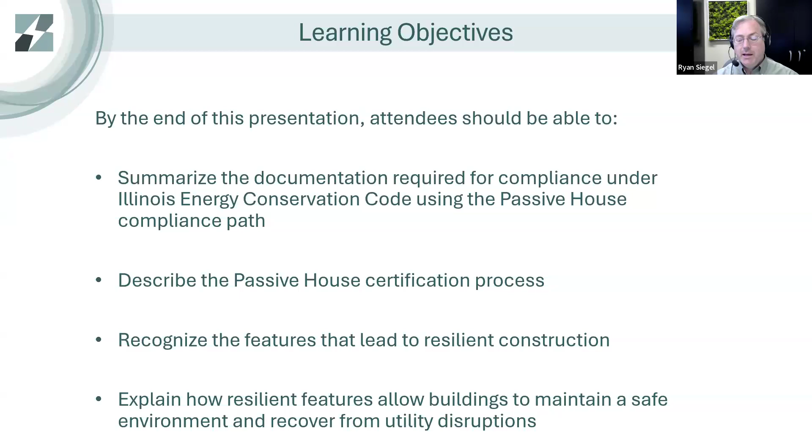We're going to walk through some of the certification process and understand those features that tie to resiliency of buildings and how that leads to a safe environment and may allow buildings to recover quicker from utility disruptions and perhaps maintain their safety for a longer period. I'm going to touch briefly on resilience and want to make sure that we're on the same page as far as what that is.

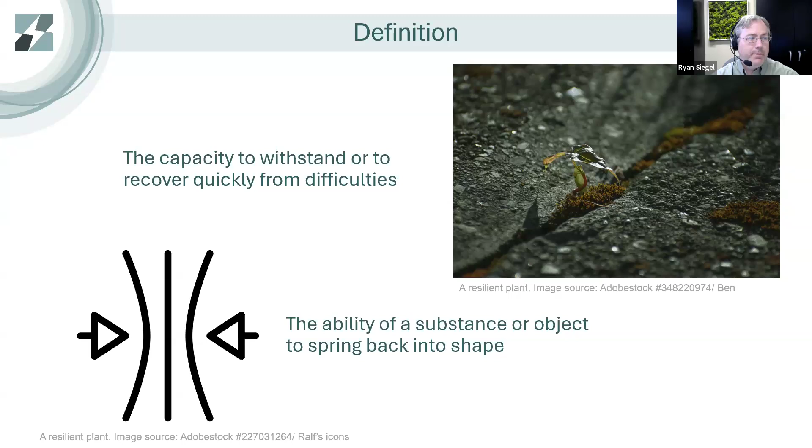So the definition that we're going to use for resilience is the capacity to withstand or to recover quickly from difficulties. So when an event occurs that has some detrimental impact, the ability to either withstand that impact or that disruption, or to recover quickly or bounce back from having that difficulty imposed upon you. This can take several forms, such as temperature, heat and cold, wind, storm, and wildfires. We don't often think of wildfires here in the prairie state, but by protecting yourself from wind and storms, you can benefit against wildfire as well as other natural disasters.

Commonly, one that we think of is utility outages. That is something that most everyone has experienced from time to time. Fortunately, we live in a state that has had a fairly robust utility system for the most part, but Phius and Passive House can be very beneficial for utility outages and maintaining that safe environment, as well as utility price spikes. Isaac will cover energy efficiency more in depth. And so if you use less energy, an increase in utility prices, while not something people will be happy about, will impact you less.

So as far as heat and cold, with more insulation and higher fenestration performance, as well as vestibules that the code often requires to be installed, at least on commercial buildings, and demand controlled ventilation. So only bringing in as much outside air as is needed for the occupants and to maintain that healthy environment, and not bringing in excessive air, can minimize how much heat loss or heat gain that building experiences.

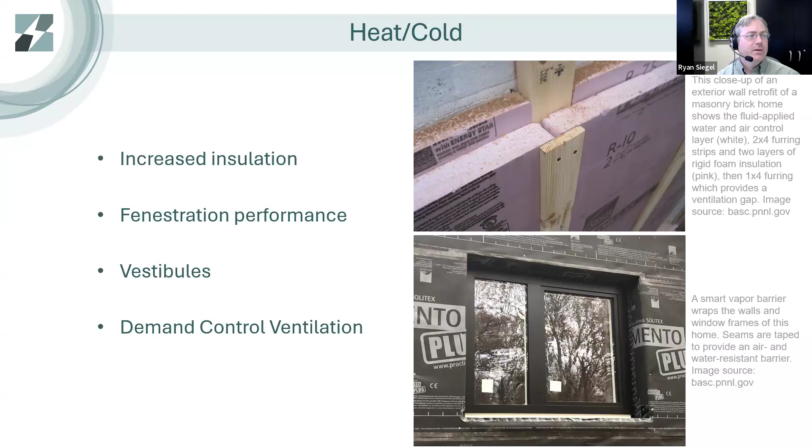With wind and storm, often is the increased air tightness. You'll often experience on very windy days spaces feel colder, especially in the winter, or in the summer, you might feel more humidity from a lack of air tightness.

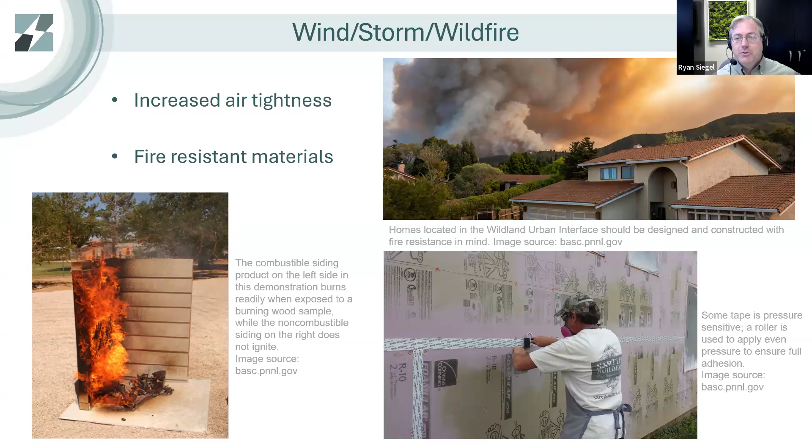And so by improving that air tightness, that also with air, that was something that California and others that have experienced wildfires this year, they noted that oftentimes by buildings allowing air into them, often that carried with it embers from distant fires that then led to structure fires as well. So having that better air tightness can improve and reduce the potential susceptibility from things such as wildfires, or even your neighbor's home that catches on fire, those embers and heat that can travel to your home.

So with utility outages, we've all experienced this, where the power will go out often in a storm, and commonly in the evening when it's the most convenient and easiest to see for crews to repair. But maintaining livability and maintaining that comfort even when the power goes out, so that we don't end up with freezing homes, or in the summer potential heat and humidity events and increased mortality from that can be substantial.

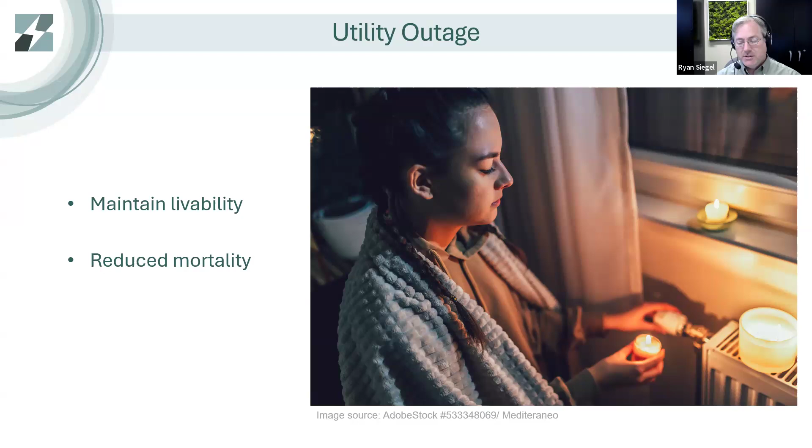Mentioned earlier, as far as the utility price spikes, using less energy obviously lowers your utility costs overall, but also as utility costs increase, the impact to you, the building owner, can be reduced by using buildings that use less energy overall.

Additionally, Phius does require high efficiency equipment as part of performance, because if you are building a high performing building, generally you're going to end up with equipment, and you'll lean towards decisions that are higher performance and more efficient with that. And also with energy recovery ventilation, as we do bring air in from outside to maintain or seek to maintain that healthy environment, making sure that we are performing that energy recovery to minimize how much energy impact that outdoor air has.

And understanding here as far as energy efficiency of heating systems, we do see that while we do have high efficiency gas equipment that can reach 92%, there is now starting to be research as far as gas heat pumps that might be in the 120, 140% efficient range. Heat pumps can often be 300 to 400%, and especially as you get into cold climate heat pump systems that are able to continue to provide heat in a relatively efficient manner, even down to below 0 degrees, as opposed to the previous heat pump technologies that really took a big hit once you got around freezing.

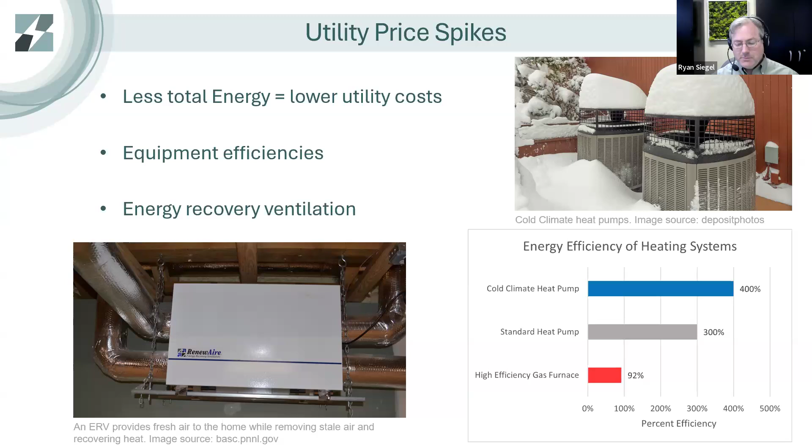So again, touching on the resilience, from temperature, all the wind, utility outages, and price spikes. So this is kind of where a lot of these features that Isaac's going to end up touching on in some of that process is leading to, and keeping in mind, how does this impact the resilience of a home?

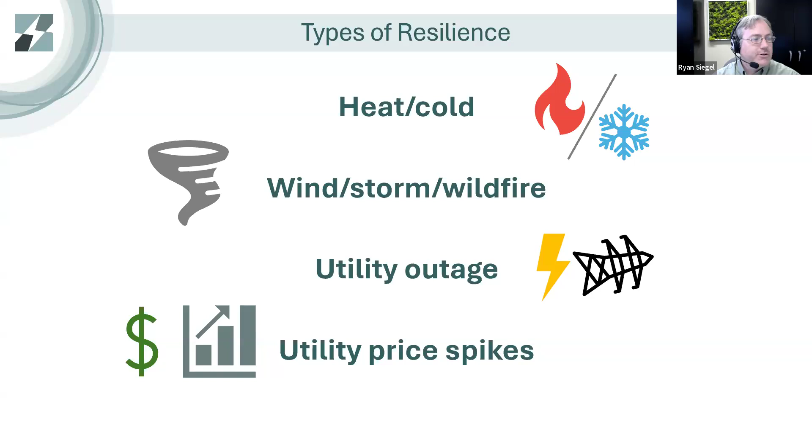Fortunately for projects that are going under the Phius project system, for the code compliance checks and the submittals for that, let's touch on that. And this is going to be fairly simple for the code officials and the inspectors, because part of going under Phius, or in the future Phius or PHI certification, is having this independent third party that is involved in the project to assist with some of these compliance checks. So the submittals for code compliance is fairly simple.

So first of which is your pre-award letter, basically calling out that this project is registered for Phius. This would be during the pre-submittal, this initial letter. Following your construction and certification, you then are issued your project certificate that you then turn in, showing that it's completed. Along with these, additionally, as part of the pre-inspection, is to provide a features list. So this is required by the code as far as your pre-submittal letter, as well as a features list.

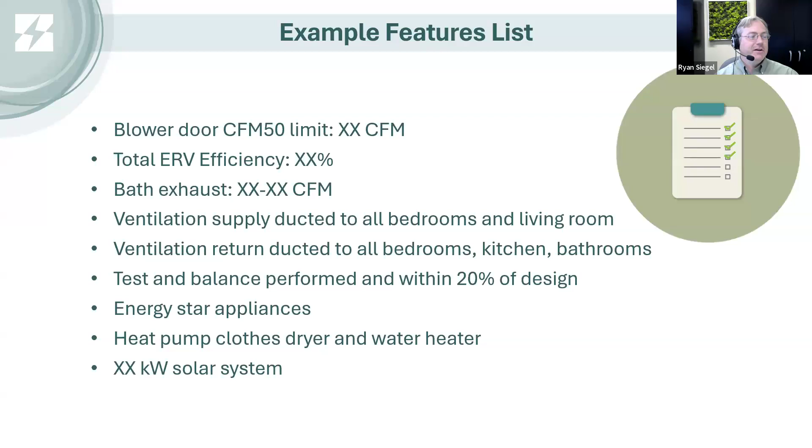So, all right. And with that, I'm going to go ahead and turn it over to Isaac so we can learn a little bit more about Phius and projects. Thank you, Ryan. Again, my name is Isaac Elnecave, and I work at Phius. I work both on the certification team, and I do the policy work in support of Phius.

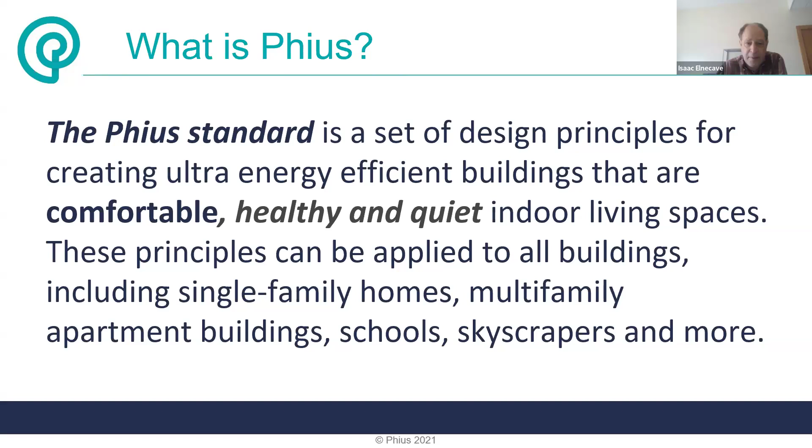So what are the principles that are behind a Phius design? These are the 5 that we always like to focus on. Number 1, we focus on continuous insulation throughout the entire envelope. As many of you probably know, the standard way that code requires is to put in insulation inside the house, in between the studs, either fiberglass batts or cellulose. And that's certainly often part of a Phius design, but we also require continuous insulation on the outside. And this is done for various reasons, but a big part is to mitigate what's called thermal bridging.

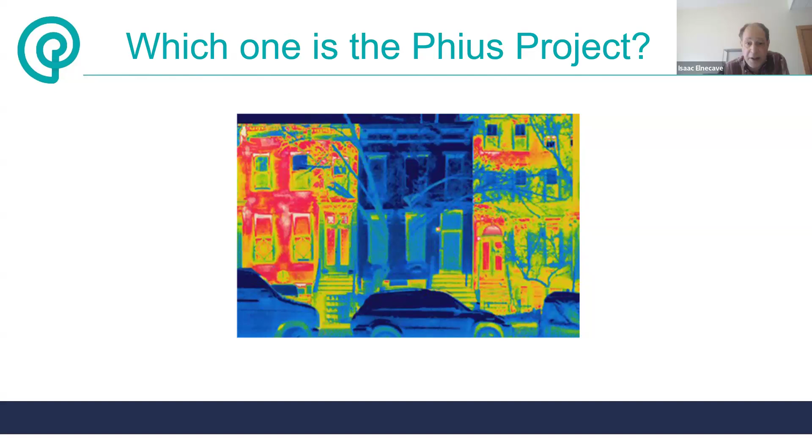The second thing is that we have an extremely airtight building envelope. It's certainly significantly tighter than code, usually about 3 to 4 times tighter. And I know that people often tell us that that's in a sense a scary concept, but as I said, we have certified over 500 buildings at this point, and people have learned how to do it.

And once you learn how to build an airtight home, the benefits just are enormous, both in terms of keeping the resilience, as Ryan mentioned. It keeps your house warm in the winter and cool in the summer. It prevents, if you will, bad air from coming in.

As we have noted in California, it does prevent the intrusion of embers, also the intrusion of dust into your house. But it mostly functions as giving you an ability to control the indoor environment. In tandem with this, we require high performance windows and doors, both in terms of how efficient they are, but how well they are installed. And again, that ties back to the airtight building envelope, and it ties back to the continuous insulation.

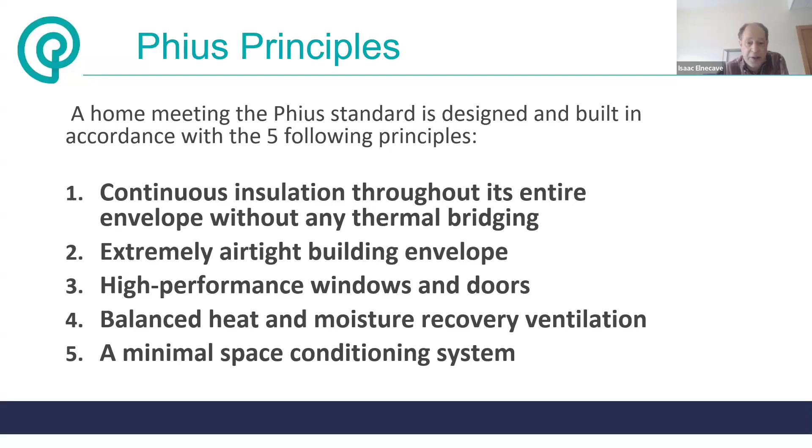So what does that entail? Buildings built to the Phius standard reduce energy use by around 33%, and that's energy use. Ryan actually wanted me to emphasize that the heating and cooling demand, not just the total energy, can actually drop by as much as 60 to 70%. Because again, we have a very airtight envelope. It's continuously insulated. The windows are extremely efficient. So your heating and your cooling loads become all of a sudden less than half of what they were before.

And then the other thing I want to emphasize is that to make sure that this happens, every project that gets a Phius certification has to go through a two-part process, which I'm going to enumerate on the next couple of slides, to ensure that the building performs to the Phius standard. It's not just having a guidebook or a set of design principles, it's putting them into practice. And we have a very, very rigorous design certification process that ensures that what you are asking for in a Phius project is what you get.

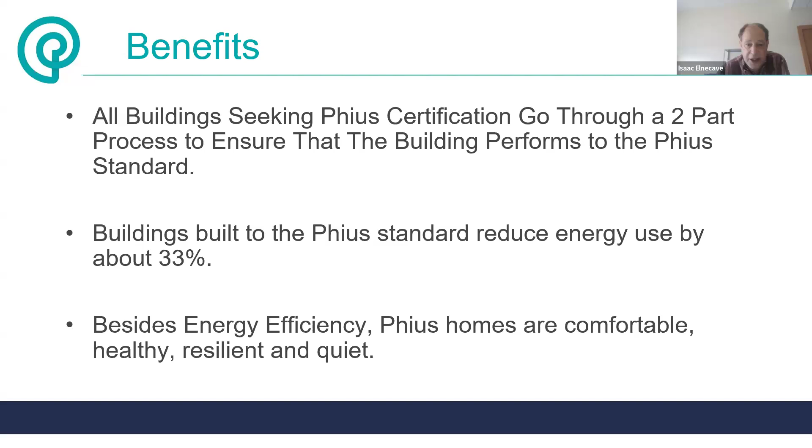Importantly, this ties back into code compliance, because at that point, code officials can be very certain that the house is going to perform the way it's meant to. And as Phius, we check pretty much everything that's related to the energy standard. So we have in our guidebook something called a new construction process matrix. So here's how it goes.

The first phase: sometimes if you're a developer or an architect and you want to know whether you want to do a Phius project, we have what's called a feasibility study, in which we will do a fairly quick analysis of your design and see, based on your geometry, the kinds of materials, and location, whether it can meet the Phius standard. The project team asks for a contract. Once the contract is signed and paid, you're registered. That's your first milestone. Once you're registered, your project will show up on the Phius website, and it becomes part of our database.

The second part, once it's registered, is called a design review. Think about this as trying to get a building permit. The CPHC, a certified passive house consultant, who you will be working with, will provide both the WUFI model, the software program, to make sure that it does meet our targets in the standard, but also make sure that all of the requirements are incorporated into the drawings and that you have the right specifications. Phius will provide very detailed review and feedback of the model, the drawings, and the specifications, making sure that it does meet our requirements.

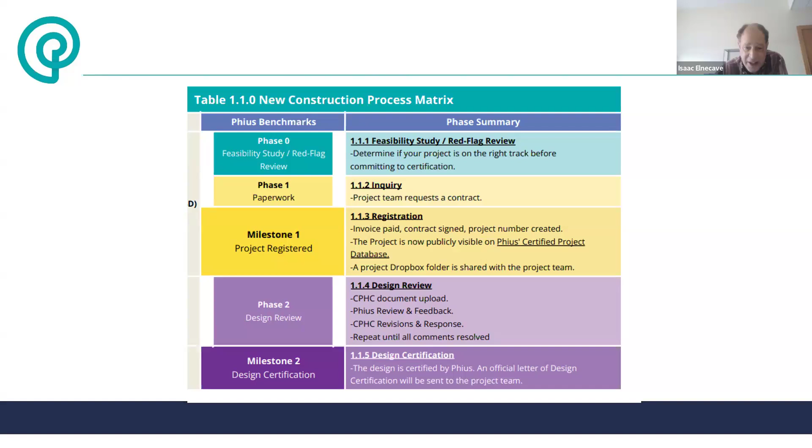So now that you've got past milestone 1, which is the registration, milestone 2, which is design certification, we move on to the next phase, which is the construction. We train consultants. We also train builders, certified passive house builders, and we also have certified passive house verifiers and raters. The builders obviously build to the design, and then we have the verifiers or the raters for single family, verifiers for multifamily.

Review and perform on-site visits. They do both on-site visits to document whether the insulation is being done correctly, whether the correct mechanical equipment is being put in, but also do some testing. Do the testing for ventilation. Make sure that airflows are coming to all the rooms as designed, and they do a blower door test to make sure that the air sealing requirement is met.

Much like the first one, Phius reviews all the documentation, and once the documentation is complete and shows that all the aspects of the design have been incorporated into the construction, Phius will provide milestone 3, which is the final certification. This functions in many ways as the C of O, in that it is now saying we have reviewed the construction, the as-built, the project is as built, and it still meets the Phius requirements.

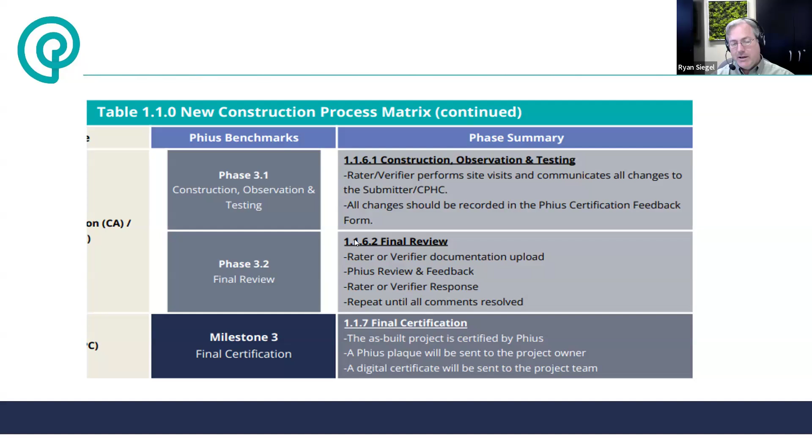So we'll perhaps touch on a few more as we go through, but transitioning over now, thinking about those principles that Isaac had talked about, and understanding for each of those principles what that does for resilience. I talked a lot about continuous insulation. If you're cold in the winter, do you put the winter coat on over you, or do you try to stuff your winter coat in between your ribs? We like a nice full, continuous winter coat.

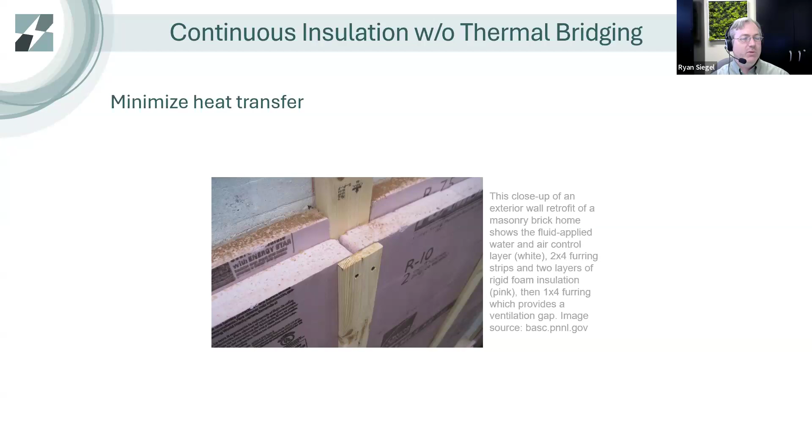So by minimizing that heat transfer, especially in the winter and summer, we have good control over the indoor conditions. We bring in how much outside air we want, when we want it, and how often we need it. So rather than relying on the building to leak air, we make it nice and tight, and then bring in the amount of air that we want. When people say buildings need to breathe, I note, well, I like to breathe every day, not just on windy days. So having that continuous insulation blanket can be very beneficial for minimizing heat gain or loss.

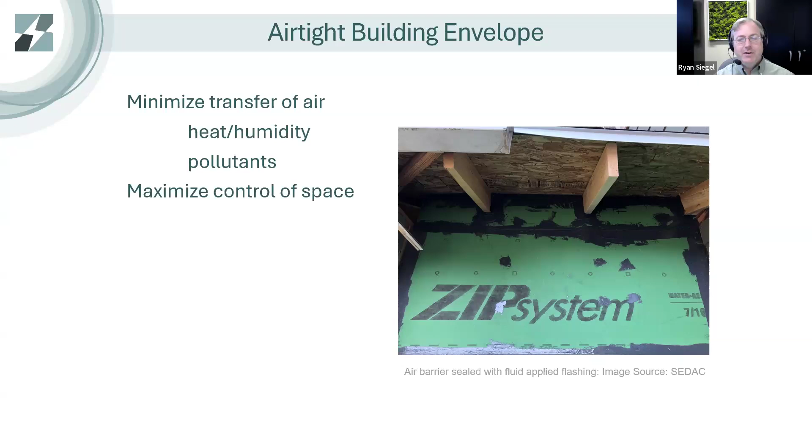Similarly, with the airtight envelope, Isaac touched on something I hadn't necessarily connected with, which was how quiet things are. We often think about air moving, transferring heat and humidity, and Isaac touched on pollutants, but also sound. A lot of sound transfers through air. So if air is able to move through, sound also moves through that space too. So by getting it airtight, we are maximizing control of that indoor space.

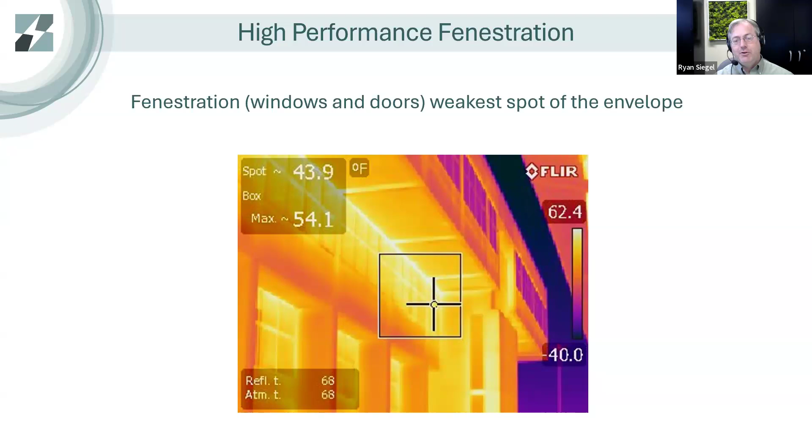So we touched on high performance fenestration, windows and doors. These are often the weakest spots of a building envelope. Even high performance windows, insulation wise, you're talking at best maybe an R10, which would be a very bad wall. So making sure that we are not relying just on code minimum windows and doors, but going above and beyond that. Addressing that weakest spot can be very beneficial.

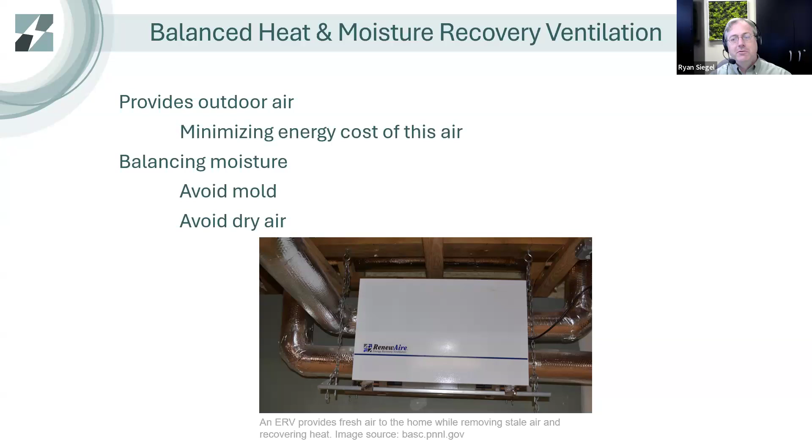Also with balanced heat and moisture recovery, also known as energy recovery, making sure that we are providing that important outside air while minimizing the cost of that. So balancing out moisture, recognizing that there is humidity outside in the summer, but there are also sources of moisture inside as well. These designs work to manage moisture from showers and cooking and plants and other things inside, so that we manage and remove moisture as we're able to, and as it's beneficial, while still keeping that in check.

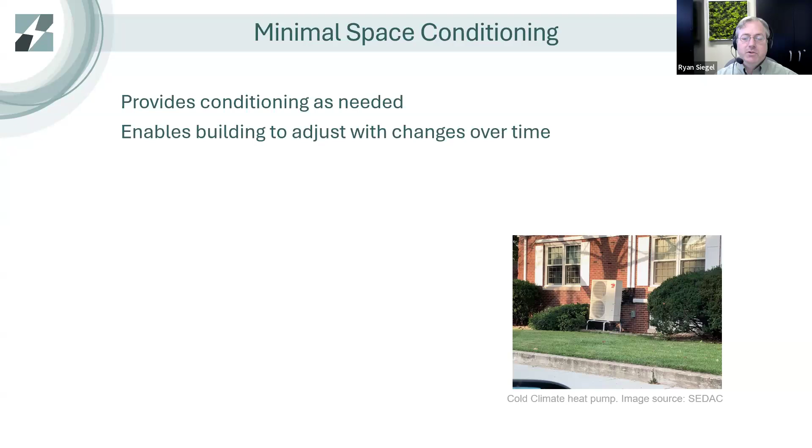And then obviously minimizing that space conditioning, recognizing this is where we're trying to provide that resilience over time, recognizing that the only constant is change. And so by having this space conditioning, while it's going to be fairly small, it allows for that building to adjust over time. The calculation was done based on a point in time. And so as conditions drift over time, having that little bit of conditioning allows that building to maintain that comfort over that long time period.